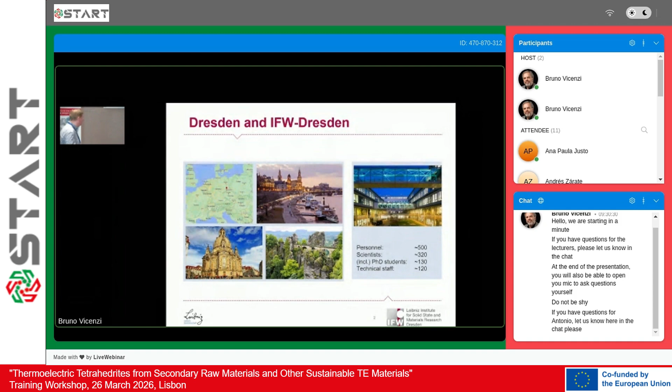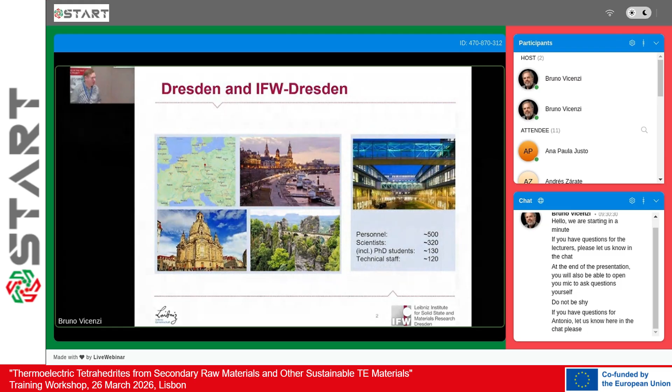At IFW Dresden, we have about 500 employees, about 300 scientists. In my unit, which I directly supervise, it's about 100 people, around 30 PhD students. It's a whole institute, and we have very good support by technicians, for example, working on the development of thermoelectric modules.

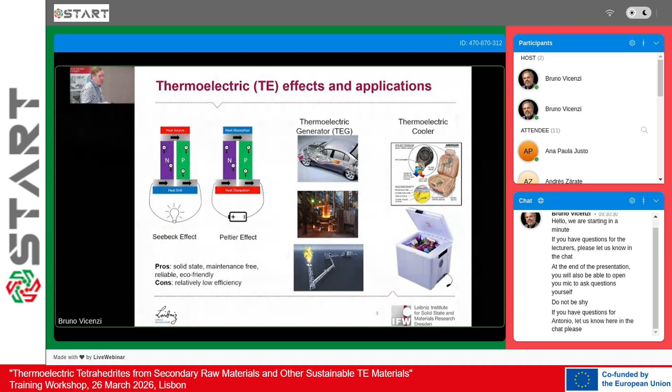As Antonio already mentioned in the previous talk, the main application field for thermoelectrics, if you look from a commercial standpoint, is thermoelectric cooling. This is the biggest market up to now, about 70-80% is for thermoelectric cooling.

There is also a great vision so far to use waste heat for thermoelectric applications and power, in principle, to produce electricity. The challenging part here, from my point of view, is that for each different application we have very different scenarios, so we need quite different modules for each application. This makes the use of waste heat or waste heat recovery quite challenging, I would say.

In photovoltaics, you have the spectra of the sun, which is quite standardized - you just focus your application to fit ideally to the spectra. Whereas here we have different scenarios, like for example steel industry, where you have very high heats in the range of 1,000 degrees for a very short time, or in the car, for example, where you have a temperature gradient of 400-500 centigrade. These are already quite different scenarios.

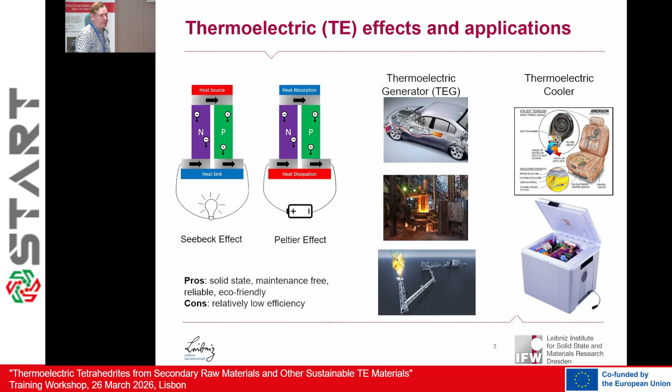I will show at the beginning some work we have done together with a company in Aachen, a survey on, in principle, the markets for thermoelectric devices. And I'll bring up a brief summary of where are the actual markets, and where are potential future markets for thermoelectric applications.

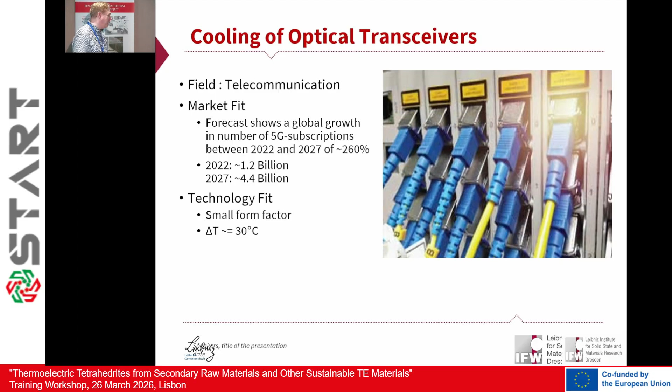One of the current biggest markets, I think, is telecommunication, especially stabilizing solid-state lasers and using thermoelectrics for temperature control in a rather narrow window to stabilize the frequencies of these lasers and the whole devices. This is probably within the whole telecommunication market, but thermoelectrics gives a huge contribution to this market. There's also demand to develop very small thermoelectric devices, with a footprint of millimeters, for example. Sometimes there are also ideas to integrate it in chips, but this is a more advanced technology.

Another field where thermoelectrics can strongly contribute is control of medical instruments, and there are different areas where you can apply it. On one hand, you have temperature control on a very precise level - this is one thing you want to do where you have, for example, a small footprint and just want to cool this small area. Here, thermoelectrics is quite useful.

There are a number of different applications here, quite a diversity of things. You can use it in liquid chromatography, in centrifuges where you want to cool it down, CO2 incubators, climate chambers, and also thermal cycling. Here thermoelectrics is quite important - when you want to reach a certain temperature relatively fast, on the time frame of seconds, I think thermoelectrics is the most ideal thing you can use. Also, in principle, it's a solid state device with no moving parts.

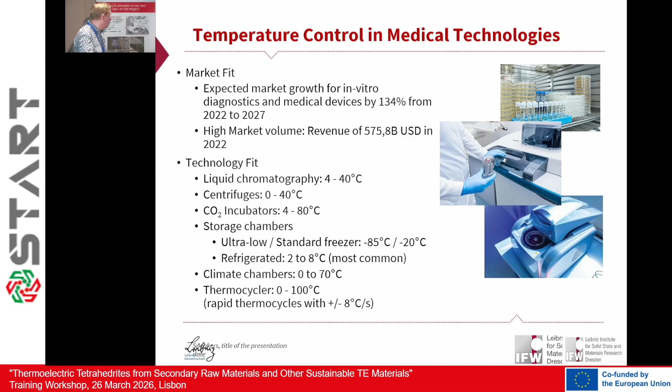This makes it very reliable to use in this area. There's probably worth organizing a separate workshop just for this area, because the devices in these areas are quite diverse, but it's a huge market for thermoelectric modules. I also know from Quick-Ohm, for example, a company selling the highest number of thermoelectric modules in Germany, collaborating with a number of these companies fabricating such devices.

Another market for thermoelectric devices is in principle the semiconductor industry. There you also have the demand to test chips on a rather small scale, to stabilize the temperature in the range between 0 degrees and 100 degrees, and also do rapid thermal cycling to test how robust these chips are. These are also specialized instruments where thermoelectric coolers are used on larger scales.

Another market is also more industrial driven, in the area of industrial lasers, for example. Here you want to stabilize the temperature, control it quite precisely. You also have, for the control of some components in these devices, you want to use thermoelectrics to stabilize the temperature, but on the other hand, also to get rid of excessive heat produced in these devices. So this is one of the markets where thermoelectric devices are used.

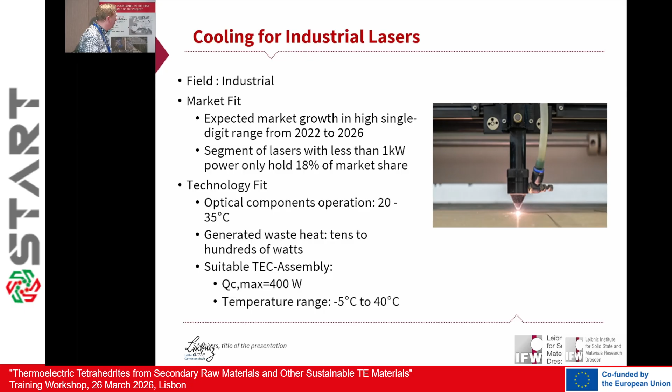And I think thermoelectrics are probably useful up to, let's say, the 1 kilowatt range. But this is really a high heat amount which has to be removed.

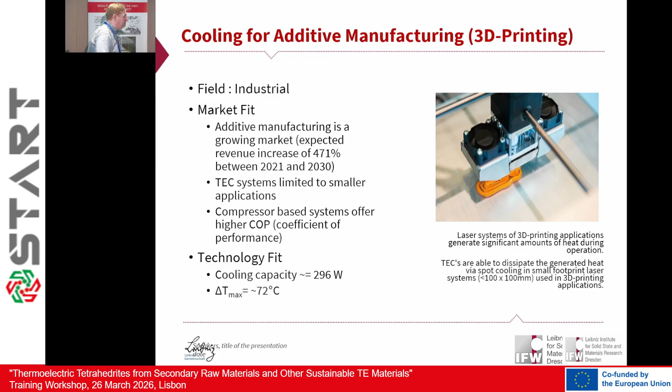Here also you can use, especially that you can produce a temperature gradient in the range of 70 centigrade, on a small spot rather rapidly with thermoelectric cooling, and this helps quite well to stabilize and control much better the three-dimensional printing process by thermoelectrics.

Then there's a market which is probably not existing yet, but there are currently some discussions about it. Since we are dealing more and more with liquefied natural gas, and to actually use liquefied natural gas, you want to vaporize the gas, and from the way that you go from the cryogenically cooled liquid to the gas, which you might later burn, you already have here a temperature gradient of 170, 180 centigrade. So quite a huge temperature gradient you could use.

And based on this evaporation process, you can, for example, per ton of liquid gas, produce about 840 megajoules per ton. So this might be quite attractive to use thermoelectrics here, especially in these gas terminals in the harbors, to produce a lot of electricity from this evaporation process. This is definitely one area where thermoelectrics could be used to do, in principle, not waste heat recovery, but waste cold recovery.

And there is actually also at the moment a project going on between Daimler Truck Company and also DLR in Stuttgart, where they also want to use, in principle, in trucks, thermoelectrics at very low temperatures to recover the waste cold.

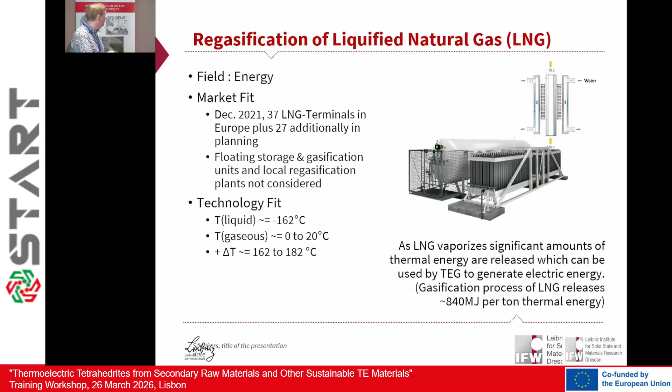This next one is more, I would say, an academic scenario. I don't think there's a big market, but at least it was published in a prominent journal recently. The idea was that you can maybe also use thermoelectrics in combination with solar cells, even to produce electricity during the night.

So the idea is you have maybe here a heat reservoir, maybe the ground, for example. This provides a lot of heat during the night. The solar cell is cooling down, emitting the heat to the air, and then you can, in a reverse process, use the heat coming from the ground to harvest with the thermoelectric module.

And here you would use a very small temperature gradient. So most likely, if I look at this very small temperature gradient, it's probably not very productive to produce a large amount of electricity, but it's at least a scenario.

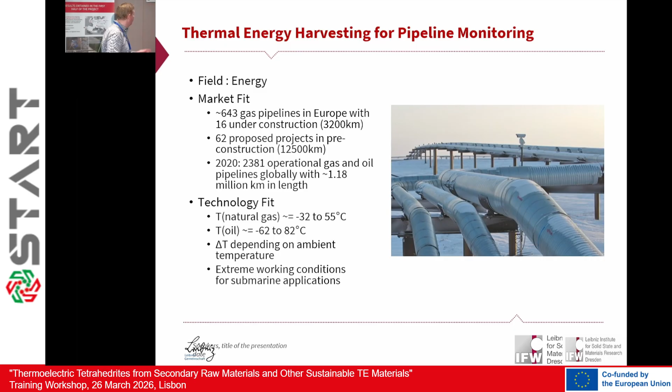Coming back to transport of fossil fuels, there's a lot of demand for pipeline monitoring, for safety of these pipelines, but also because in some areas of the world you don't know exactly how much you should receive versus what's sent, so there might be leakages during transport that you want to monitor. For this pipeline monitoring, you can use thermoelectrics for energy-autarkic sensors. You have a local autark system using the temperature gradient provided, for example, by the temperature of the oil versus the ambient condition. This works the same with oil pipelines and gas pipelines, and can be quite helpful for monitoring these pipelines.

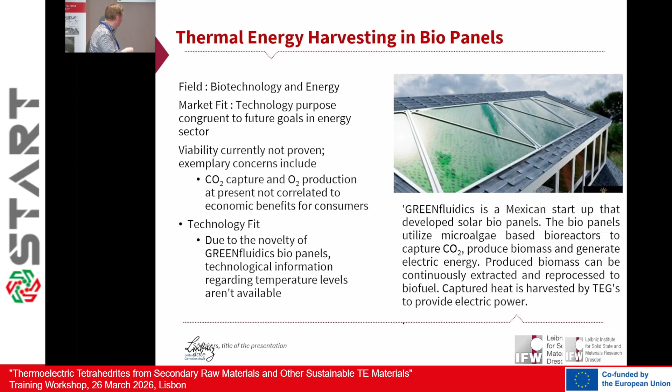Another scenario under discussion involves a company, GREENfluidics in Mexico. They use something that looks more like a solar cell, but their idea is to grow and harvest algae and use these devices for CO2 capture. This also produces a lot of waste heat, which could potentially be utilized by thermoelectrics. These are scenarios discussed that might not be a big market, but at least are some possibilities.

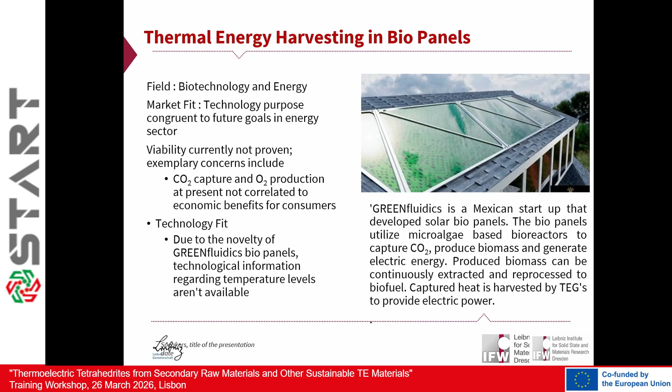This was a bit of an overview of what could potentially be done in thermoelectrics in the future, and also what is done partly up to now. Now we'll talk more about what we have done, and introduce shortly another device which works a bit different, or looks a bit different, than the standard thermoelectric device.

We have worked for a while within a European project on microstructured thermoelectric devices. The material we used, in terms of thermoelectric performance, is rather decent, but we managed to have a very low contact resistance in these devices. You can use these devices, for example, to stabilize the temperature of solid-state lasers, integrating them directly with the laser. The advantage is that you can stabilize temperatures within milliseconds, whereas a standard thermoelectric device would stabilize temperature in seconds. This works because you have a much smaller thermal mass, so you can react much more rapidly.

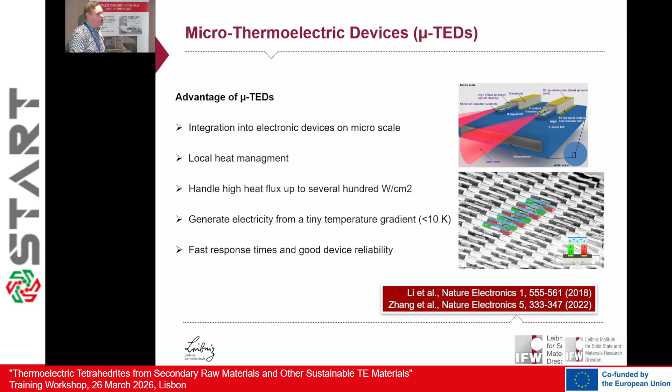On the other hand, since you have so many legs on a rather small footprint, you can also produce a rather high voltage with these devices, which could open up a number of new applications. This gives an overview of what could be done if you miniaturize these thermoelectric devices.

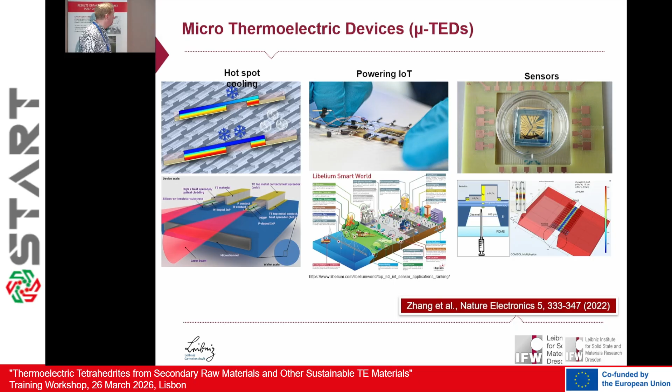You can think about hotspot cooling, definitely. You can also think about powering IoT devices - we have one project at the moment running on that. Also, if you bring it together with, for example, microfluidics, you can maybe use it for biotechnology or medical applications. And the stabilization of lasers on a small footprint is also one of the ideas that could be done.

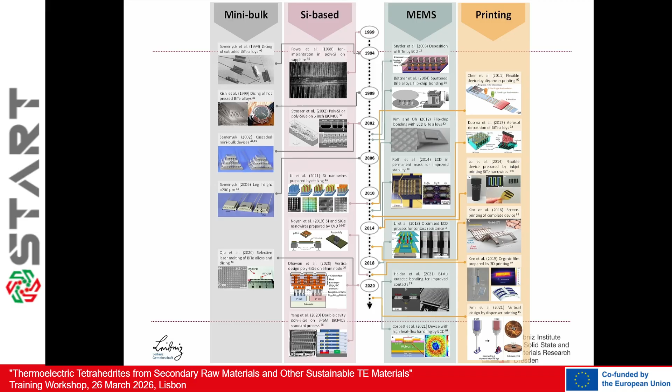Then there's also the idea to use silicon technology, integrating the whole fabrication process into microstructure silicon technology. You can also bring it onto the chip. There are some ideas and discussions about new silicon-based materials for thermoelectric applications, and a number of harvesting devices have been reported.

Then there's a third branch where we have been active for a while, which is in the MEMS space, where we combine, for example, microstructure technology and electrochemistry, and grow these microstructure devices in a quite reliable and successful way.

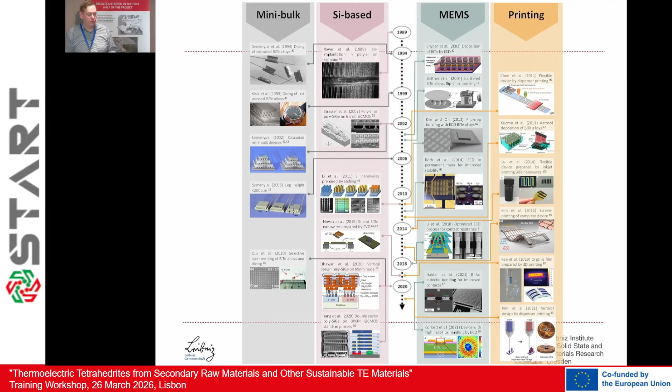Then there's a fourth branch, where people use more additive manufacturing techniques and chemical synthesis approaches, doing 3D printing, for example, of thermoelectric devices. Especially in the US and Korea, there are quite active groups in these areas fabricating partly flexible devices, but also introducing a number of new materials by using this 3D printing technique.

Now I come to the second part of my presentation, where I want to shortly talk about how we go from a material to a thermoelectric device, using especially magnesium antimonide. This has already been addressed somewhat, and there are also some tricky points I will address here.

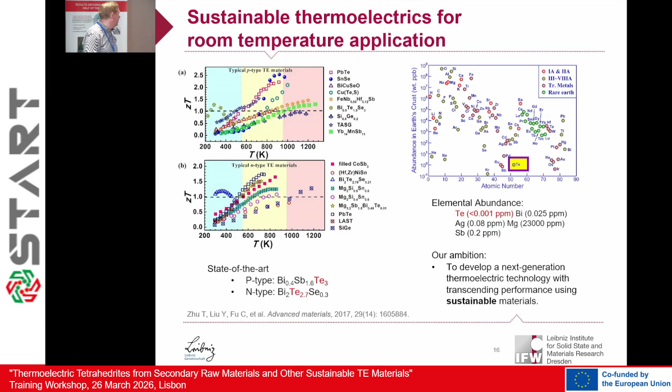Magnesium antimonide is at the moment the most promising material to replace bismuth telluride-based materials. Look at the two important components: P-type bismuth antimony telluride and N-type bismuth telluride selenide. These make up 95% of all commercially available thermoelectric devices. A lot of recent development has focused on higher temperatures, so they're not really useful for thermoelectric cooling, for example.

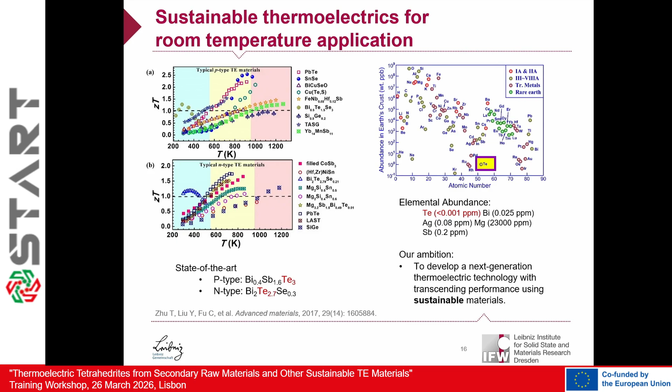A lot of these materials have not really been tested in devices. So our strategy is to use these two compounds, magnesium bismuth antimonide. You see very high performance here around room temperature. This is the N-type material, very promising.

For a very long time it was known this could be a very promising material, but people hadn't figured out how to solve the issue of losing magnesium during the fabrication process. Nowadays, you usually work with an excess of about 10-20% magnesium to stabilize the compound during hot pressing, and this helps reach these high ZT values.

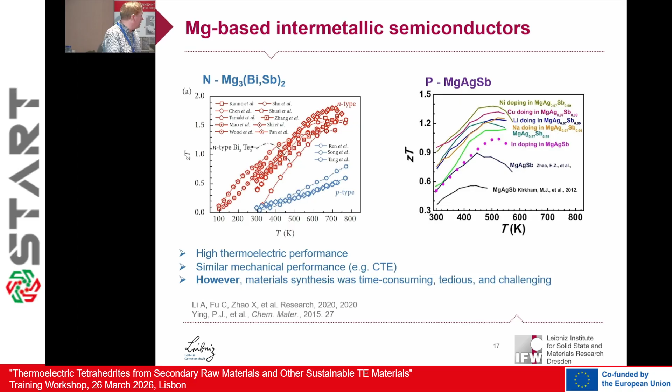The performance of the P-type material is rather moderate. We've made some improvements, but the P-type material is a low performer, I would say, though it's okay. Therefore, we decided to use P-type magnesium silver antimonide. There are some issues about phase transitions, which I'll shortly address. This combination could be used for thermoelectric cooling, but also for low temperature waste heat recovery.

One comment about the phase transition in magnesium silver antimonide: up to 300 centigrade this works quite nicely. You have this alpha phase, which is very robust. If you go beyond 300 centigrade, you get transformation to beta, which is still okay, but you don't want to reach the gamma phase, because it's not really reversible. Therefore you try to stay away, and you should not treat your device beyond 300 centigrade.

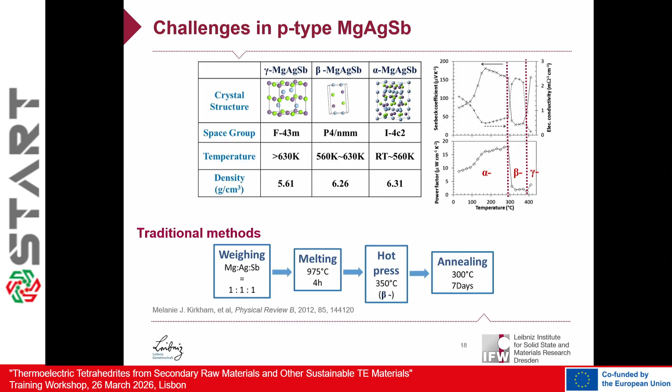What was also challenged at the beginning was that the fabrication process was rather lengthy. You can see fabricating the material, hot pressing, and then annealing for 7 days. In terms of industrial production this is not very attractive—you'll probably have to pay a quite high electricity bill.

So we decided to do it in a much faster way: directly doing bulk mechanical alloying, taking the elements directly. Also, to simplify the contacting, we directly compact these materials together with the thermoelectric material when we compact it. For magnesium silver antimonide we use silver as a contact material, and for the N-type material we use iron as a contact material.

Here's an impression of how these contacts look. We have the transition between silver and magnesium silver antimonide—there's a quite nice interface, with no large intermixing zone. The same holds for the N-type material with iron; we also have a good transition between both materials.

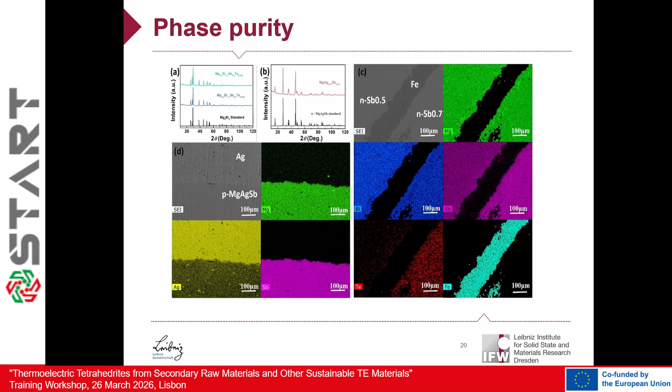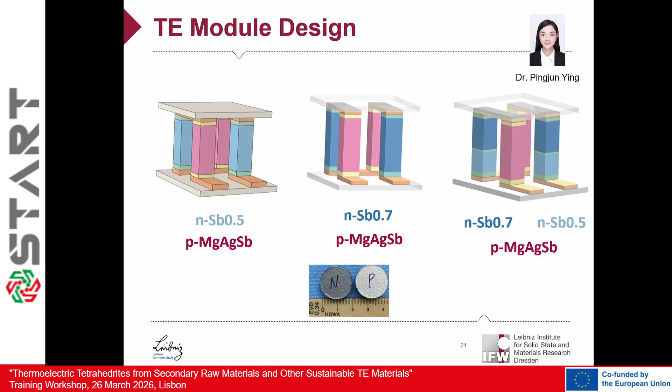One strategy to boost the efficiency of these modules from the beginning was to work on the N-type side with segmentation, using two compositions. One composition has a rather small concentration of antimony, applied at lower temperatures, and the higher concentration of antimony is used at higher temperatures. This gives you some boost in terms of efficiency.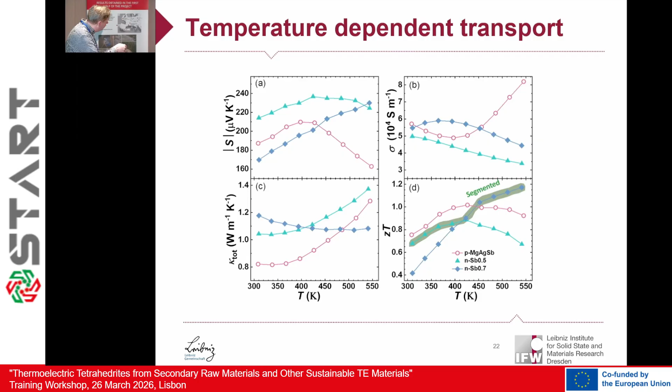Combining this gives an overview of the thermoelectric properties. The Seebeck coefficient is rather high over the whole regime, and electric conductivity is also rather good. But the important factor is the ZT number. When we combine the segmentation for the N-type materials, we keep it at a very high level over the whole temperature regime. Comparing with the P-type material, over the whole temperature regime we are close to a ZT of 1.

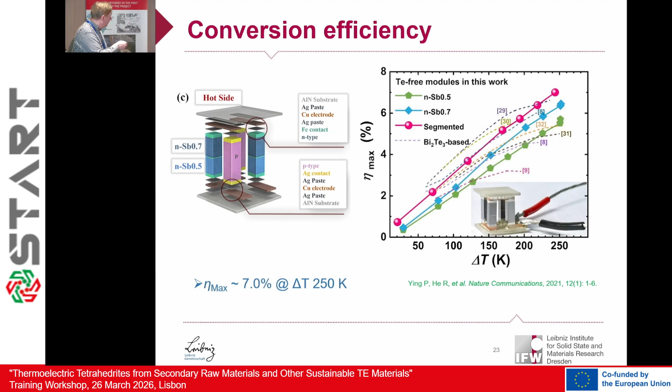The most recently optimized N-type material reaches a ZT of about 1.4, which is a very promising result. These were the earliest data, where we had an efficiency of about 7% when we did this combination segmentation of the N-type and P-type material as a whole, applying a temperature gradient of 250 Kelvin. This was roughly 5 years ago.

Very important for all thermoelectric devices, and this also comes into play in these simulations, are in principle the contact resistances. You can have an excellent material, but if your contact resistance is high, you ruin the whole device. On the other hand, you can have a decent thermoelectric material, but if you have excellent contacts, you still get a good device. This is, I think, quite often overlooked when people talk about ZT—that contact resistance is often more important to take a look at for devices.

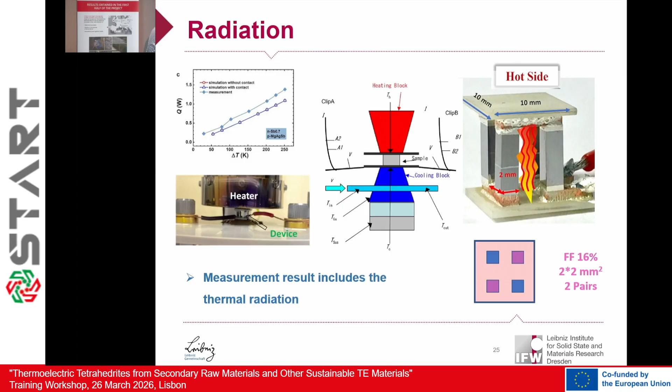At an earlier stage we also figured out that we had a rather small filling factor, about 16% for example, so there are some radiative heat losses. When we improve the filling factor, going from 16% up to 64%, so 4 times higher, we can significantly improve the device.

This was done in this study, where we varied the filling factor and also played around with a different configuration—instead of a 2 times 2 configuration, a 4 times 4 configuration. When we do this, you can see that when we come to the highest filling factor, 64%, we also have the highest efficiency.

There's a more than 1% gain, so about 8.2% efficiency when we apply a temperature gradient of 260 Kelvin. If you compare this with many other materials, including magnesium-based materials and bismuth telluride-based materials, we have the steepest increase of efficiency, and you can see this relationship quite nicely.

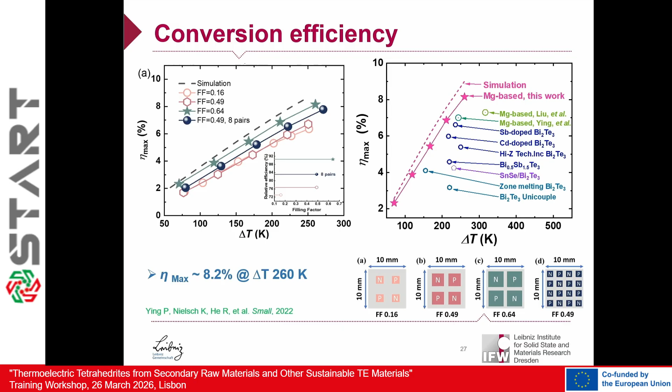So if you apply a higher temperature gradient, you obtain a higher efficiency. If you draw up the line, if you could apply, for example, on the magnesium silver antimony a 400 centigrade temperature gradient, you would definitely reach more than 10%. But since we cannot apply more than 300 centigrade at the moment with a P-type material, we cannot reach more than 10%.

Another strategy to improve it is to play a bit about the doping and the crystal structure. This is very different—the magnesium material behaves very differently compared to bismuth telluride. With bismuth telluride, you can make very tiny grains and get very low thermal conductivity, which works quite nicely.

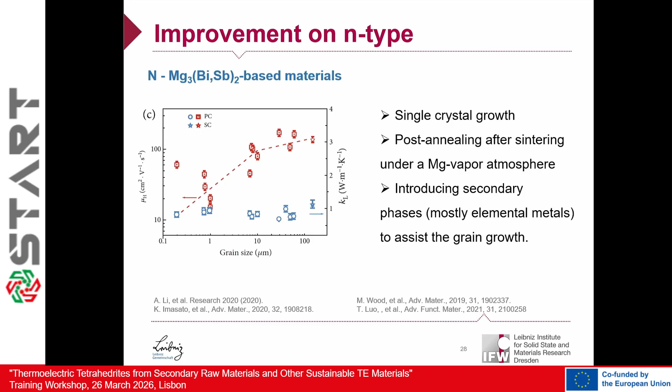Here you have to apply a very different strategy. You like to have very large grains because the mobility of the charge carrier is strongly affected by the grain size. When you come down to grains in the range of 100 micrometers, you have mobilities of the charge carrier which are very close to single crystals.

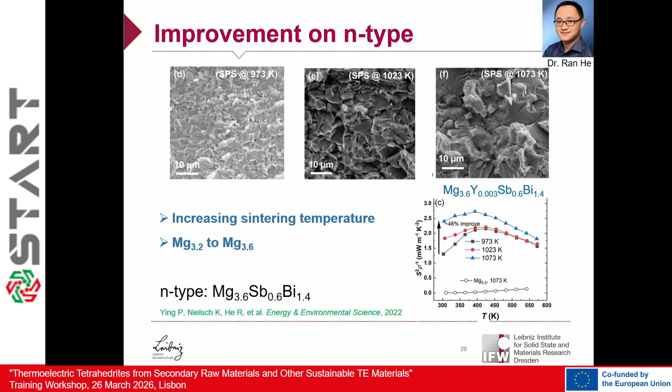This can be optimized by changing the compaction conditions. We use spark plasma sintering at different temperatures, for example. When we apply 100 degrees more, we have larger grains, and the power factor performance is much higher. In this formula, a 20% excess of magnesium is used when we apply the higher temperature, so we have some loss of magnesium, but there may be ways in future to work with smaller excess ratios of magnesium in production.

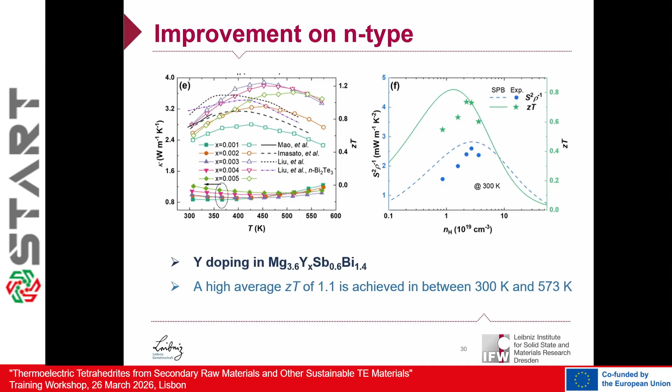Playing around with the dopant is also another way to optimize the material, making it even better. Here, for example, instead of tellurium we used yttrium, and this led to a higher mobility of the charge carrier, and also enhanced the average performance, ZT, to 1.1 in this temperature regime up to about 573 Kelvin. This is another way to boost it further.

After doing all these optimization steps, we have an efficiency of 8.5%, for example, on these modules, when we have a temperature gradient of 260 Kelvin applied. And even with moderate temperature gradients, 75 degrees, just heating the hot side up roughly about 100 centigrade, we already have 3% efficiency.

This 3% efficiency is usually what you obtain with most commercial bismuth telluride-based modules when you apply a temperature gradient of 200 or 150 centigrade.

We also have some data points from other modules with higher temperature materials like skutterudites or half-Heuslers. Their efficiency is not higher because they perform very weak on the low temperature side. So you can only harvest the heat from the higher temperature, not from the lower.

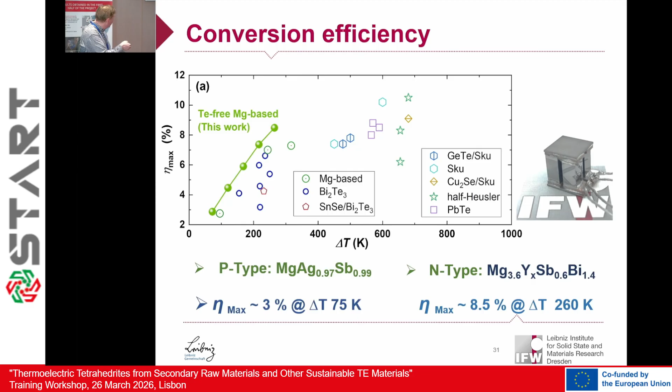But if you combine magnesium antimonide with, for example, a skutterudite-based module or a half-Heusler, most likely you can reach efficiencies in the range of 15 to 20%.

Since cooling is the most important market for thermoelectrics up to now, we have tested also the cooling performance. Here a delta T of 72 Kelvin was reached.

This module is not optimized for cooling, so we would most likely change a bit the composition of the material. We would also change the geometric parameters for cooling, but this is one of the targets we want to look into in the future, to optimize these modules for cooling.

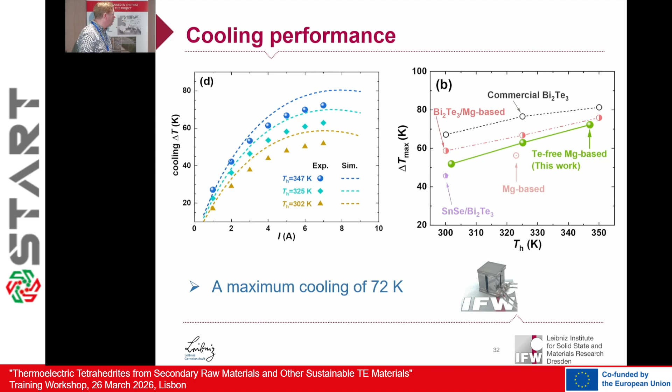Then comes the important factor, magnesium. There are some instabilities and so on. How can we deal with it in terms of cycling tests?

We did some rather harsh treatment of these modules, treating them a bit more harshly than bismuth telluride modules. We heat up these modules on one side to more than 200 centigrade, then let it cool down. The heat up is about roughly 1 minute, the cool down is about 9 minutes, so one cycle is typically 10 minutes.

When we repeat this cycle for several thousand times, we can see the degradation of these modules by monitoring the internal resistance.

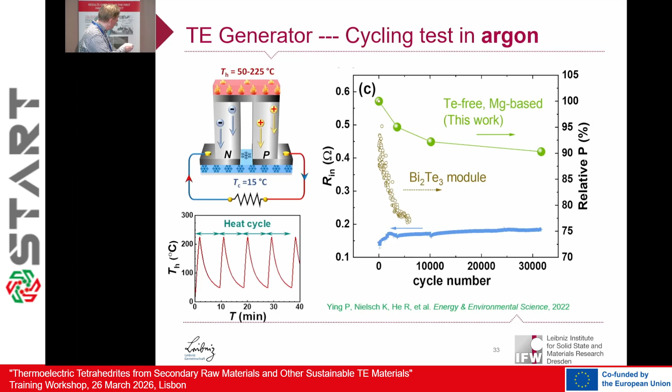The first test was done under inert atmosphere in a glove box. They're rather stable. You can see the degradation of the bismuth telluride-based modules, and they're degrading much, much faster.

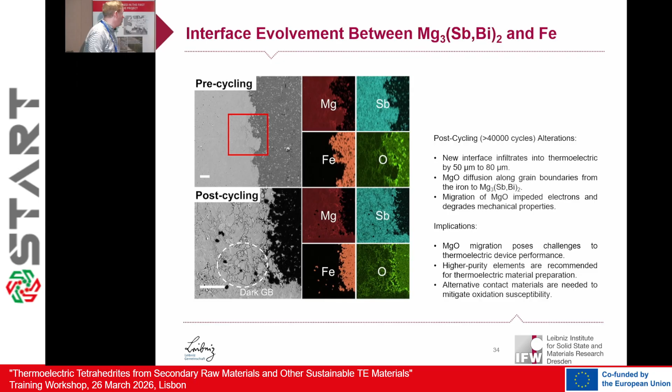These are some tests when we do cycling of the modules. What is changing? There are some degradation effects, but I think most of the degradation happens at the interface to the soldering. So the weakest point at the moment in our modules is the soldering, but this can also be solved in the future.

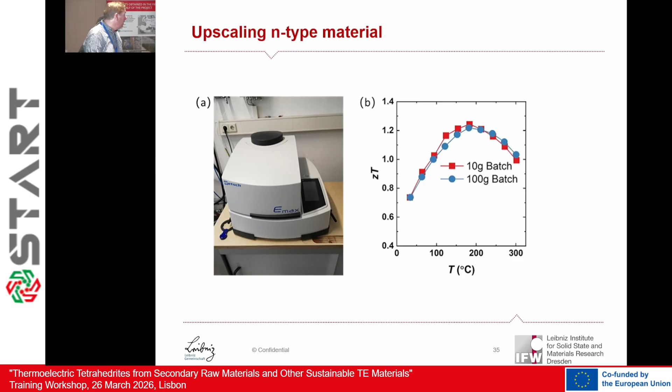Before I move on to stabilization, I'll shortly talk about upscaling. You can upscale the material synthesis for the N-type material rather easily; kilogram scale should be easily doable. P-type material is a bit more challenging to upscale, but this also works.

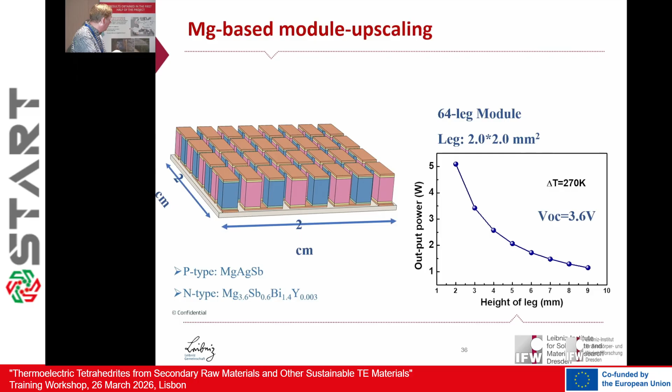The modules we are currently fabricating are, for example, these 8x8 configurations, with a footprint of 20 by 20 millimeters. The final module, this was a stage when we simulated the whole module, and this we are now fabricating at a larger scale.

One of the challenges we figured out when fabricating this material at larger scale, also making modules out of it, was the dicing of this material. It takes a lot of effort. There's also a cost analysis from Vicente Pacheco showing that the dicing process itself consumes a lot of money in the fabrication of the whole module. It's not really the material itself, but the dicing process.

What we figured out was that the N-type material can be diced quite easily, within 1 or 2 hours—rather straightforward. But the P-type material was, at the beginning, very nasty; it took days, up to a week, just to dice the P-type material. We have now optimized the dicing process; this can be done within hours, but in the first months this was really a bottleneck, just the dicing of the P-type material.

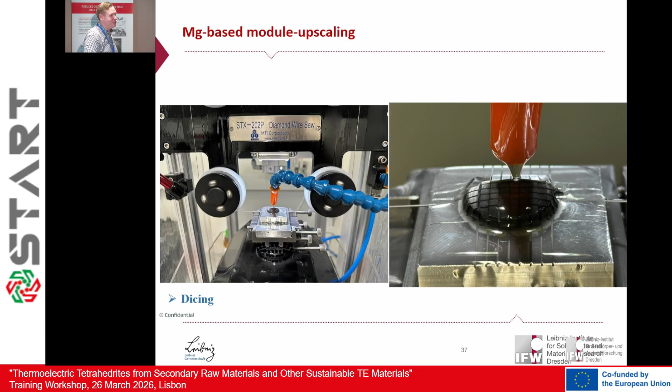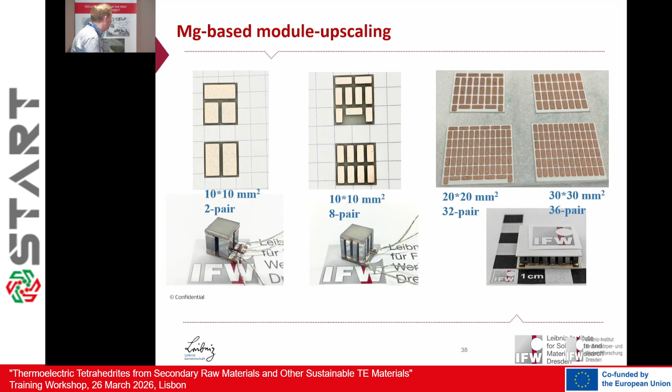This shows a bit the assembly process. At the moment we use standard assembly with the 8x8 configuration, but there are also ideas to go to larger configurations in the future.

Coming to the stabilization of this whole module: since we have magnesium antimonides, the risk that they get destroyed when operating in air is rather straightforward. So we used the atomic layer deposition process. The beauty of this process is that you can use the whole assembled module and coat the whole structure with a film, for example of hafnium oxide or aluminum oxide.

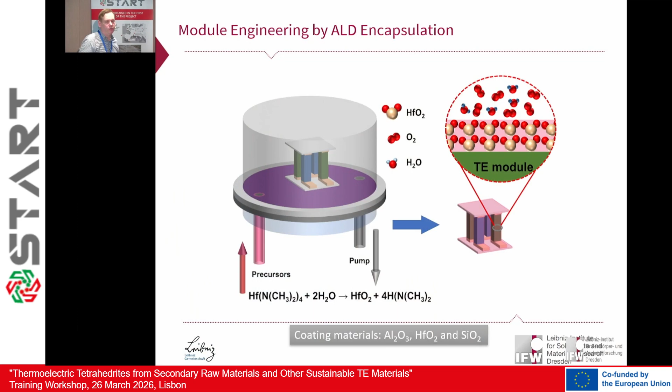It turned out that aluminum oxide is less ideal, but I'll talk about it shortly. The most ideal are now silicon oxide and hafnium oxide. These two materials we now use for coating these modules, and we coat typically about 200 nanometers of oxide material.

This gives an impression of how the assembled module looks when we are not doing any cycling - this is a simple module with a 2x2 configuration. After cycling in air, you have degradation effects on the hot side, like expected. If you coat the whole module with 200 nanometers of hafnium oxide, after the cycling process there's no strong degradation effect observable.

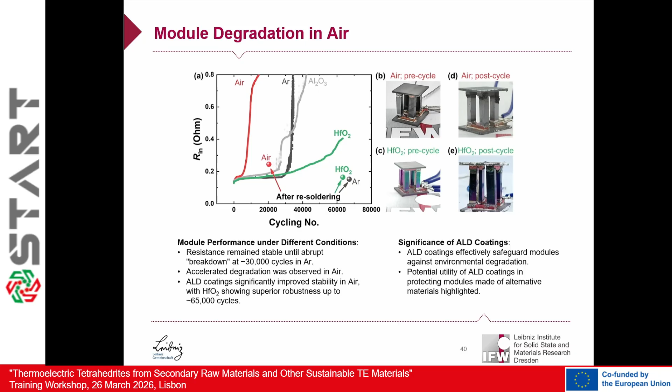If you cycle a module in air for a very long time, after a few thousand cycles you cannot use it anymore. If you put aluminum oxide on it, it works a bit better for longer, but aluminum oxide forms with magnesium oxide a rather easily water-soluble oxide, and this doesn't really protect our module. So you should use a more robust oxide, like silicon oxide and hafnium oxide.

If you do this, you can see that if we cycle this whole module for half a year, it's rather stable. What we've figured out is that the weakest point is the soldering. If we unsolder the module and resolder it again, we come back to the same performance we had from the beginning. So the weakest point requiring optimization is the soldering material, to find a better way to thermostabilize this module.

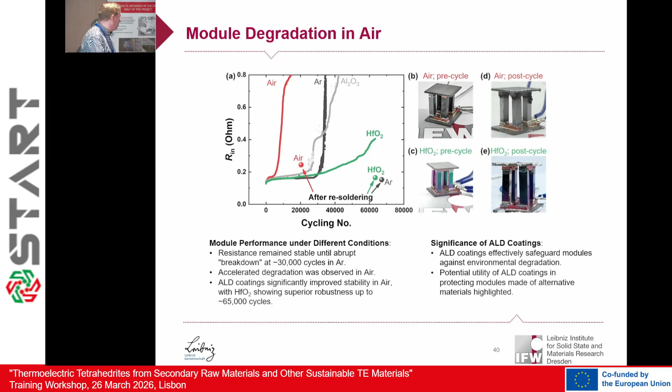For all the cooling applications in this temperature regime, where you're usually heating up to a maximum of 100 degrees or so, you don't have to do this.

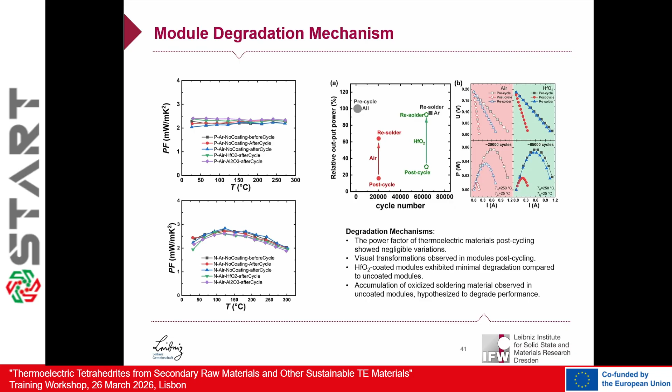This shows all the testing with soldering, unsoldering, operating with different coatings. You can see this material is rather stable. The weakest point in all the study we figured out is the soldering. If you redo the resoldering, you get back to the same performance you had at the beginning, when you have for example the hafnium oxide coating. This gives very good performance.

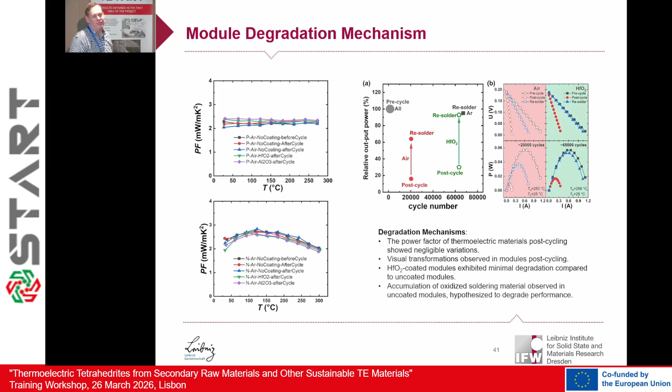One question I always get from the thermoelectric community is why we're using hafnium oxide. Mainly the answer is that hafnium oxide is a very important material in the semiconductor community, and this is a process we can nicely use. But we also now have the process available for silicon oxide, or we might use in future a material like zirconium oxide.

Let me summarize my presentation. We were able to fabricate, from very sustainable P and N-type material, thermoelectric modules. Efficiency is about 8.5%; internally we might already have about 9% efficiency in this temperature regime.

Cooling performance is also very competitive with bismuth telluride. Stability is very slightly changing, about 10%, when we really cycle for half a year. And there's a lot of opportunity to do surface modifications of these modules to stabilize the whole module.